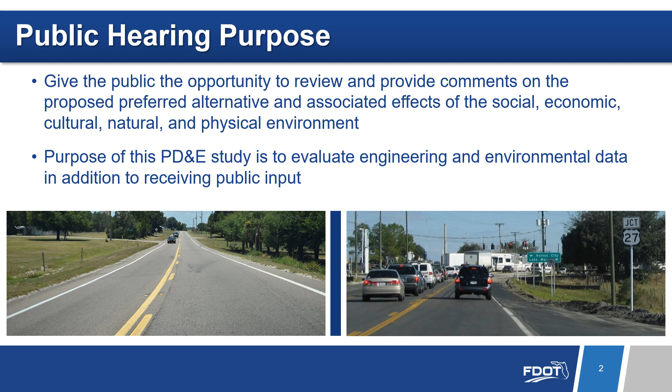The purpose of this PD&E study is to evaluate engineering and environmental data and document information that will aid FDOT District 1 and the FDOT Office of Environmental Management, or OEM, in determining the type, preliminary design, and location of the proposed improvements. The study begins at Martin Luther King Boulevard and extends approximately 8 miles in Polk County to State Road 17. State Road 544 traverses 3 jurisdictions: the City of Winter Haven, Polk County, and Haines City.

State Road 544 plays an important role in the regional network by providing east-west access for a growing area of east-central Polk County. The department proposes to widen this segment of State Road 544. The need for the proposed improvements is to improve operational conditions and accommodate projected travel demand, enhance mobility options and multimodal access, and support economic development.

The proposed widening of State Road 544 meets the objectives of the Polk Transportation Planning Organization, TPO, Long Range Transportation Plan, or LRTP, in transforming this corridor into a complete street.

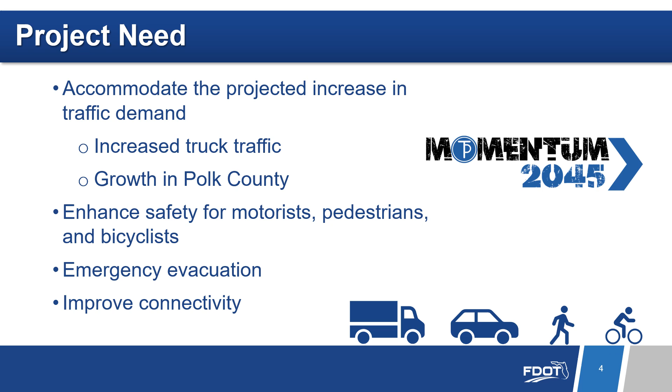At this time, the proposed State Road 544 widening project is identified in the Polk TPO 2045 LRTP Cost Feasible Plan through construction. Segment 1 from Martin Luther King Boulevard to Avenue Y is identified in the Transportation Improvement Plan, TIP, and the State Transportation Improvement Plan, STIP, with funding in fiscal year 2025 for design and 2027 for right-of-way and construction. Within the project limits, State Road 544 is classified as a 2-lane urban minor arterial from Martin Luther King Boulevard to US 27 and is a 4-lane undivided urban collector from US 27 to State Road 17.

The roadway features 2 12-foot travel lanes with turn lanes at intersections along the corridor. Approaching State Road 17, the roadway features 4 travel lanes, 2 in each direction. Paved shoulders are present on the majority of the corridor. The roadway also features an open drainage system.

However, curbs and gutters exist from Martin Luther King Boulevard to Avenue Y, from La Vista Drive to State Road 17, and in other areas where sidewalks are present. Marked bicycle lanes exist on both sides of the roadway from just west of Brenton Manor Avenue to just east of US 27. The posted speed limit ranges from 35 miles per hour to 55 miles per hour. Existing right-of-way widths vary from as little as 50 feet up to 170 feet wide.

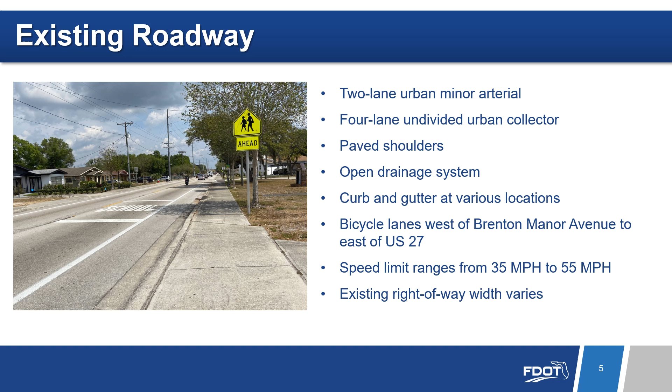Throughout this PD&E study process, FDOT has looked at many different concepts to widen the existing 2 lanes of State Road 544 to 4 lanes, and for opportunities to include multimodal improvements. After environmental and engineering analysis and public and agency comments, many of these alternatives were eliminated.

The last public meeting was an Alternatives Public Information meeting held on February 8, 2022. At that meeting, we asked for your input on proposed improvements. Some of the feedback received included a preference for a 4-lane roadway, attention to traffic volumes at the east end of the project area, concerns regarding future traffic volumes and potential noise, and community access and signal placement.

Based on your comments and additional environmental and engineering analysis, a preferred alternative was selected for State Road 544. Due to the length and diversity of the roadway along this corridor, State Road 544 was divided into 8 evaluation segments. Segment 1 is from Martin Luther King Boulevard to Avenue Y, through the Florence Villa neighborhood.

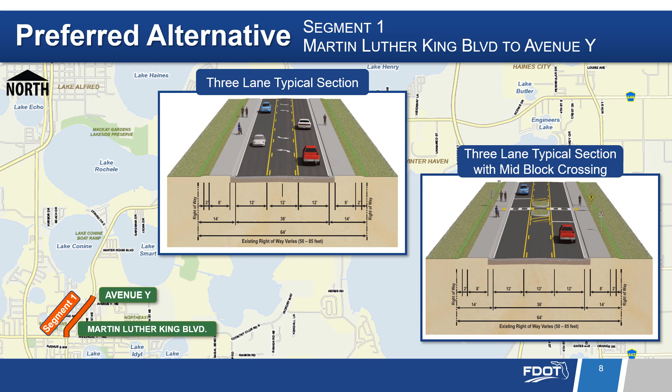The preferred typical section in Segment 1 is the 3-lane typical section with the best fit alignment. It is slightly wider than the 2-lane alternative and will have minor right-of-way impacts with no residential relocations. The 3-lane typical section will provide additional safety and capacity for turning vehicles with the center turn lane. The graphics here illustrate the typical section with and without mid-block pedestrian crossings.

The preferred improvement at the Martin Luther King Boulevard intersection is to maintain the existing traffic signal but add a new southbound right turn lane at the intersection. Improvements also include realigning the 1st Street Northwest intersection with State Road 544 farther away from the Martin Luther King Boulevard intersection. At Avenue Y, the mini roundabout with a 90-foot inscribed diameter is recommended.

Unlike traffic signals, roundabouts ensure continuous traffic flow during power outages, reducing disruptions during events such as hurricanes. This concept will minimize impacts to the residences, businesses, and the church located at this intersection, while providing an opportunity for an entrance feature to the historic Florence Villa neighborhood, and a speed control for vehicles entering the neighborhood.

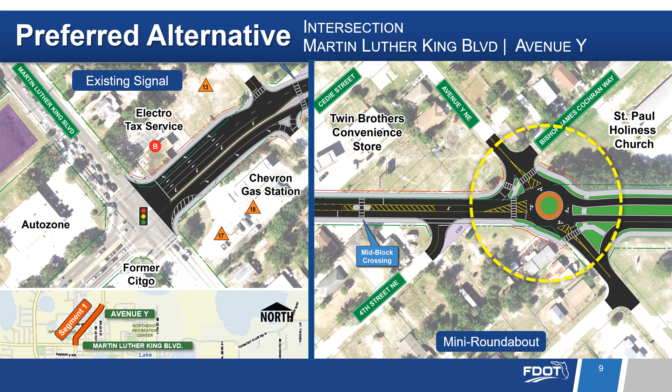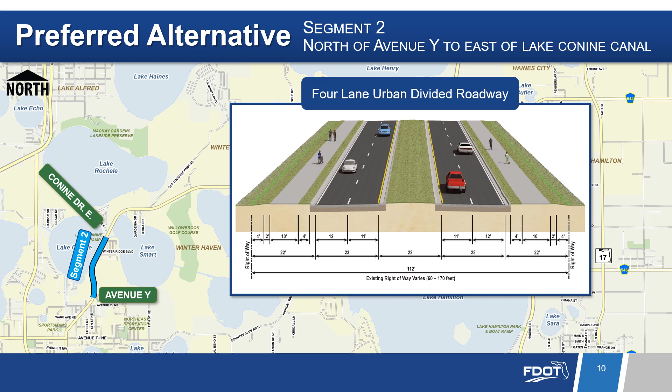Segment 3 is east of the Lake Conine Canal to east of the west end of Old Lucerne Park Road. A 4-lane divided roadway is proposed with widening to the north side of the road. This alignment is recommended to avoid impacts to existing residential developments on the south side of State Road 544 and due to the proximity of the road to Lake Smart and wetlands along the lake.

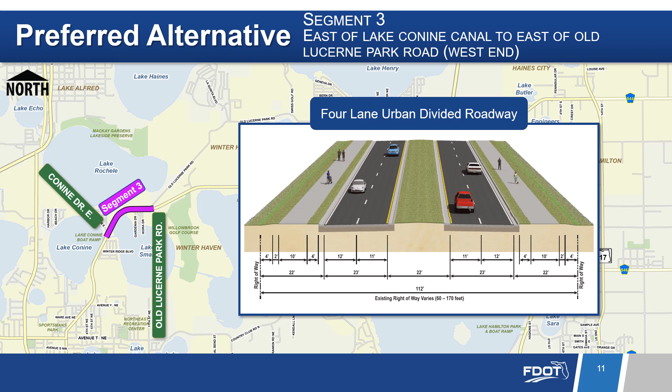The preferred alternative at the west end of the Old Lucerne Park Road intersection is to realign Old Lucerne Park Road to align with Vista del Lago Drive and to provide a roundabout at the intersection.

Unlike traffic signals, roundabouts ensure continuous traffic flow, even during power outages, reducing disruptions due to events such as hurricanes. The roundabout will help with speed control along State Road 544 and improve safety by reducing crash severity when compared to the traffic signal option.

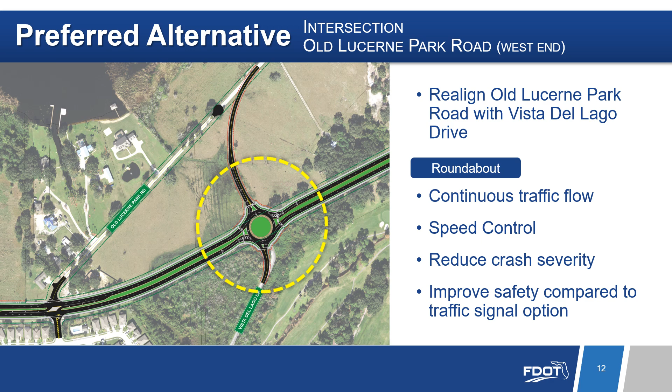Segment 4 is from east of the west end of Old Lucerne Park Road to east of Lucerne Loop Road. A 4-lane divided roadway is proposed with center widening.

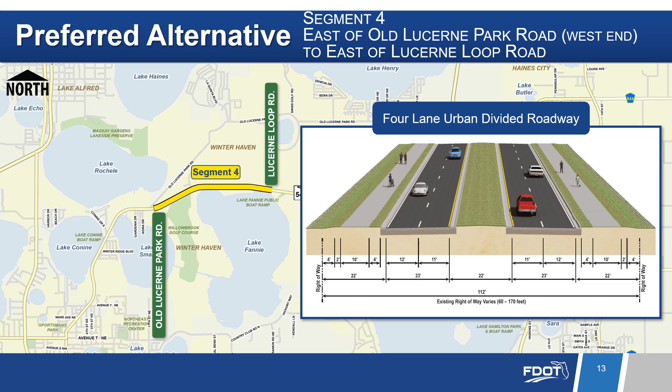The preferred improvement at the Lucerne Loop Road intersection is a roundabout. Unlike traffic signals, roundabouts ensure continuous traffic flow even during power outages, reducing disruptions during events such as hurricanes. The roundabout will help with speed control along State Road 544 and improve safety by reducing crash severity when compared to the traffic signal option.

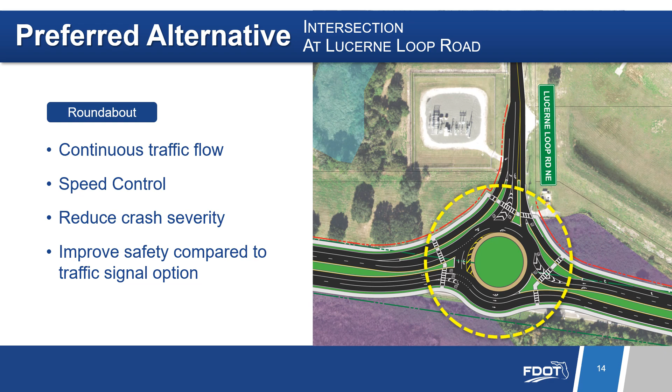Segment 5 is from east of Lucerne Loop Road to east of the Lake Hamilton Canal. A 4-lane divided roadway is proposed with widening to the north side of the road. This alignment is recommended to avoid impacts to the Lake Region Lakes Management District boat ramp and to the proposed Duke Energy transmission easement poles on the south side of the road.

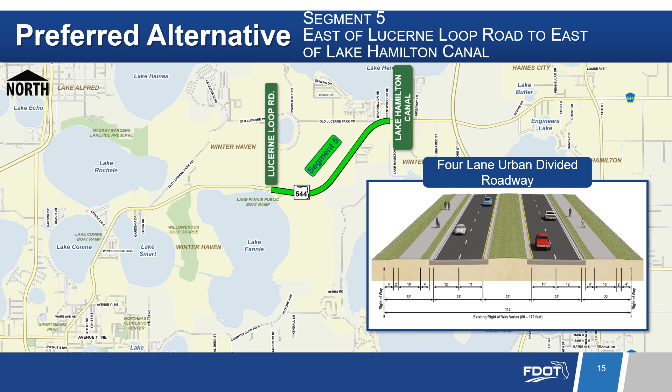The preferred improvement at the east end of the Old Lucerne Park Road intersection is a roundabout. Unlike traffic signals, roundabouts ensure continuous traffic flow even during power outages, reducing disruptions during events such as hurricanes. The roundabout will also help with speed control on State Road 544 and increase safety by reducing severe crashes when compared to the traffic signal option at this skewed intersection.

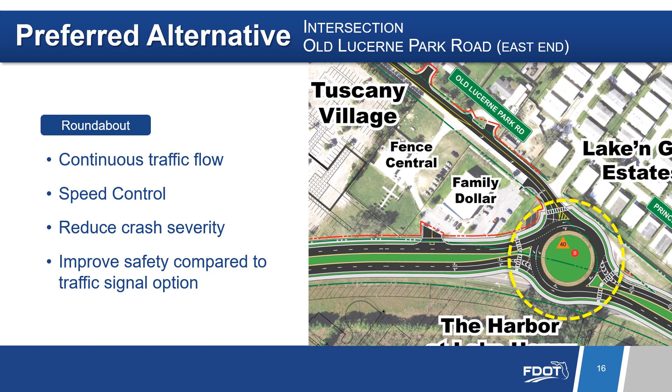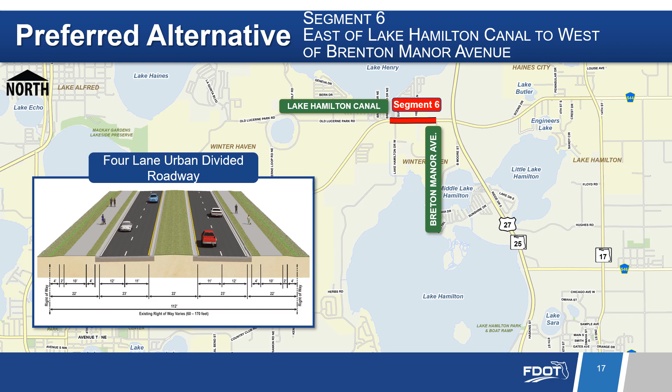Segment 6 is from east of the Lake Hamilton Canal to west of Brenton Manor Avenue. A 4-lane divided roadway is proposed with widening to the north side of the road. This alignment is recommended to avoid impacts to the Duke Energy transmission easement poles and existing commercial development on the south side of the road.

The signalized through-cut alternative is recommended at the Lake Hamilton Drive intersection. This option includes realigning the two internal roads for the developments on the north side of State Road 544 so that they intersect State Road 544 in a single location at the north leg of the intersection.

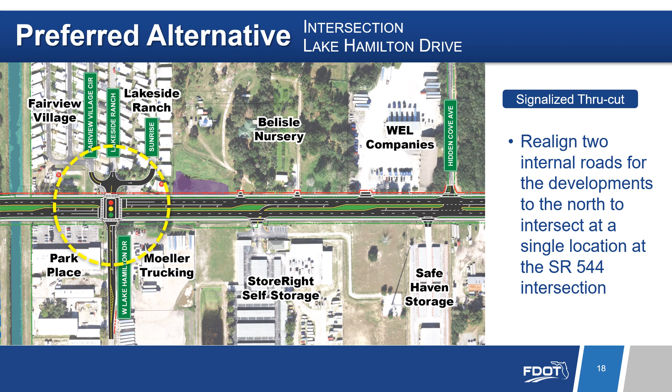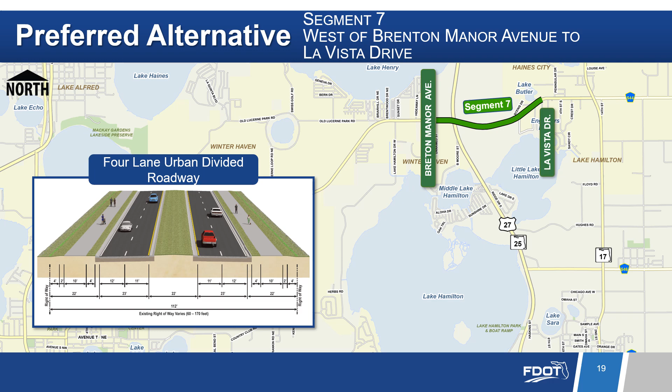This alignment is recommended to avoid impacts to Duke Energy transmission easement poles that switch from the south side of the road to the north side of the road through the US 27 intersection.

The preferred intersection improvement at Brenton Manor Avenue is a roundabout. Unlike traffic signals, roundabouts ensure continuous traffic flow even during power outages, reducing disruptions due to events such as hurricanes. The roundabout will help with speed control along State Road 544 and improve safety by reducing crash severity when compared to the traffic signal option.

This intersection concept is paired with the recommended single-point urban interchange at US 27. The single-point urban interchange is a recommended improvement at the US 27 intersection due to the lower predicted life cycle crash cost with this concept compared to the Northwest Quadrant roadway with 3 signalized intersections.

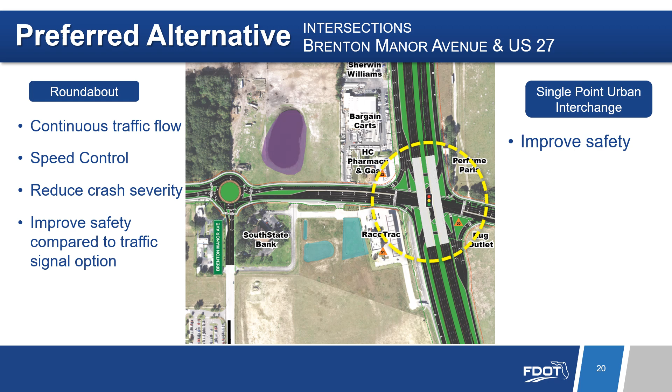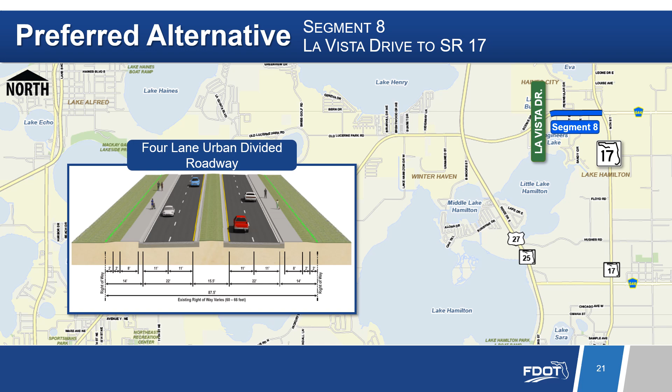The preferred concept for the State Road 17 intersection is a traffic signal with only improvements to the west leg of the intersection.

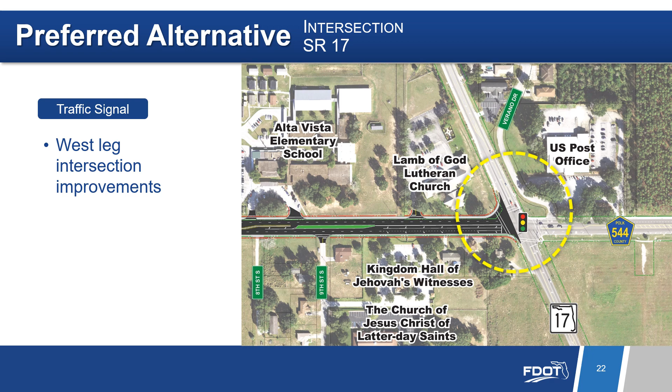Throughout this study, a no-build alternative is also considered. The no-build alternative assumes that no improvements are made to State Road 544 through the year 2045, except for routine maintenance. There are advantages and disadvantages to the no-build alternative.

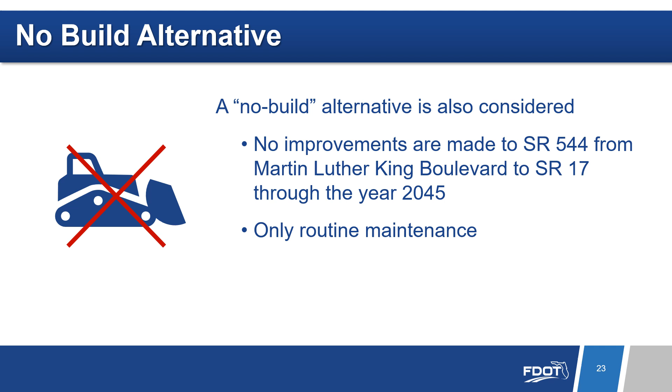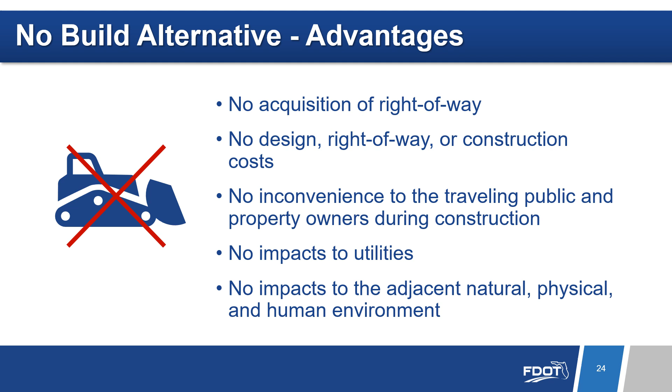Advantages of the no-build alternative include no acquisition of right-of-way, no design, right-of-way, or construction cost, no inconvenience to the traveling public and property owners during construction, no impacts to utilities, and no impacts to the adjacent natural, physical, and human environment.

Disadvantages include it is not consistent with the Polk County Polk TPO LRTP, where the widening of State Road 544 from Martin Luther King Boulevard to State Road 17 is identified in the cost-feasible plan. The no-build alternative does not improve multimodal mobility.

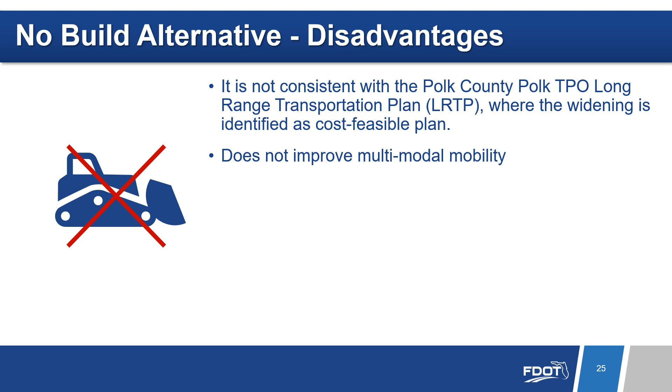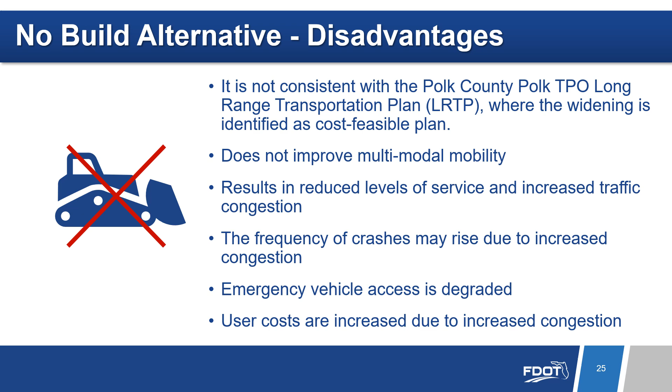It results in reduced levels of service and increased traffic congestion. The frequency of crashes may rise due to increased congestion. Emergency vehicle access is degraded, and user costs are increased due to increased congestion. The no-build alternative remains a valid option and will continue to be evaluated until the completion of this study.

FDOT evaluated environmental and socioeconomic factors relating to proposed widening improvements in accordance with the National Environmental Policy Act of 1969, as amended, and other federal requirements.

The evaluation considered the effects of widening State Road 544 on protected species and habitat, wetlands and floodplains, water quality,

stormwater management and permitting, air quality, right-of-way requirements and relocations, contamination, archaeological and historical resources, recreational sites, noise, land use, construction effects, and farmland.

Protected species and habitats are afforded special protection under the Endangered Species Act of 1973, as amended, and Florida statutes. FDOT assessed species within the project limits, and through ongoing coordination with U.S. Fish and Wildlife Service,

has determined that the proposed project may affect, but is not likely to adversely affect, the existence of certain federally listed threatened or endangered species.

The animal species include the eastern black rail, wood stork, Audubon's crested caracara, Everglades snail kite, and the eastern indigo snake.

Additionally, the proposed project may affect, likely to adversely affect, the existence of certain federally listed threatened or endangered species. The animal species include the blue-tailed mole skink and the sand skink.

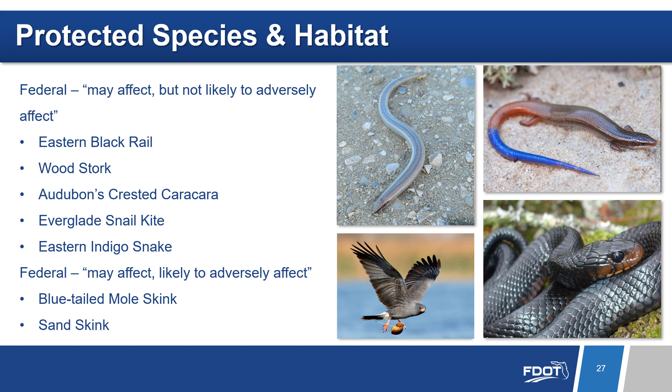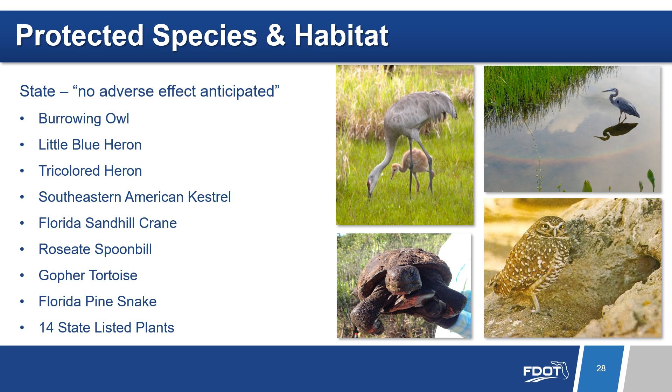Coordination with U.S. Fish and Wildlife Service regarding the final status of these species is ongoing. A sand skink survey will be conducted during the design phase. If the preferred alternative is approved and is located within a tricolored bat consultation area, a bat survey will be conducted during the design phase.

If the preferred alternative is approved by the Office of Environmental Management, FDOT District 1 will continue to work closely with environmental agencies in future phases, such as design and construction, to meet all environmental permitting requirements.

FDOT evaluated wetlands within the project limits in accordance with Executive Order 11990, Protection of Wetlands. The proposed improvements will affect approximately 14.11 acres of wetlands and 2.66 acres of other surface waters.

The department will take all practical measures to minimize harm to this area. The department will mitigate wetland impacts resulting from this project's construction to meet requirements of Florida statutes and the United States Code.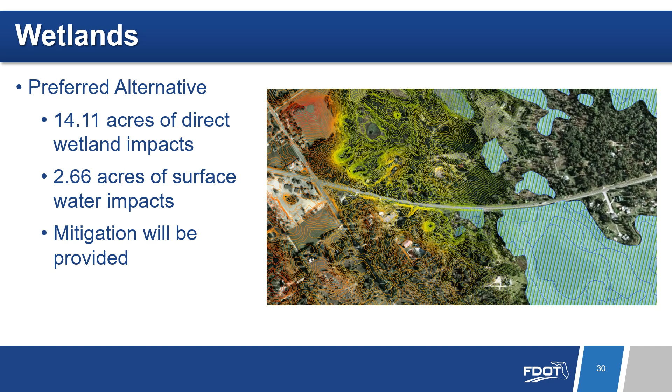The project has been evaluated for potential floodplain involvement in accordance with Executive Order 11988, Floodplain Management. There is no significant change in flood risk as a result of the proposed widening, and minimal impacts are expected to the 100-year floodplain,

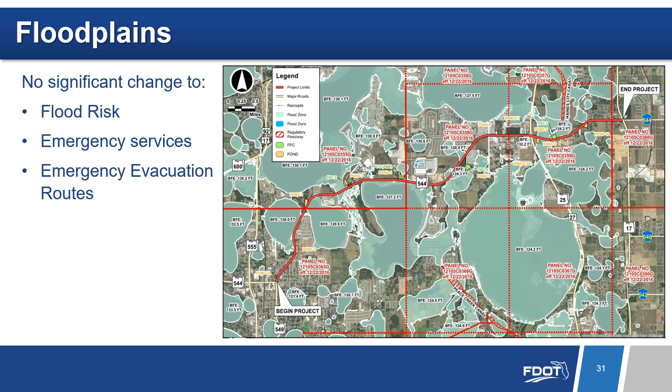nor is there significant change in potential for interruption or termination of emergency services or emergency evacuation routes due to flooding.

Results of the environmental contamination screening showed 3 sites were ranked high for potential contamination, 6 sites were ranked medium for potential contamination, and 30 sites were ranked low or no for potential contamination.

For the sites that are ranked low for contamination, no further action is required at this time.

For the sites with a risk ranking of high or medium, the FDOT project manager and the District Contamination Impact Coordinator will coordinate on further actions during the design phase that must be taken to address contamination issues.

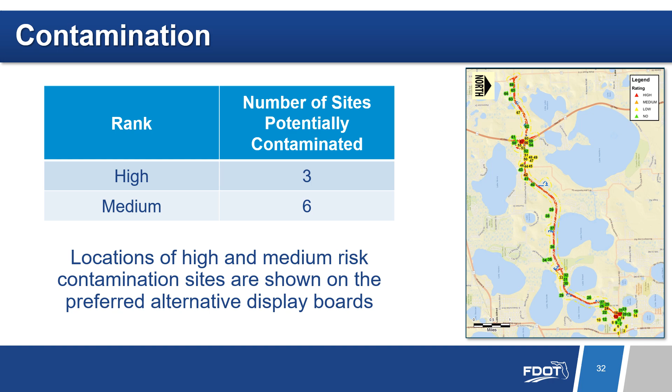Before construction, specially trained crews will address contamination in these areas as required. Locations of these sites are shown on the concept plans on display tonight.

The effects of traffic noise associated with the preferred build alternative have been evaluated in accordance with Title 23, Code of Federal Regulations, Part 772, and with the FDOT PD&E Manual, Part 2, Chapter 18.

It was determined that construction of noise barriers at Winter Ridge Condominiums, Lake Point Landing, Lake Smart Estates, Brookhaven Village, Lake Rochelle Estates, Lake and Golf Estates, and near residences from Pomona Street to 5th Street South

are a potentially feasible and cost-reasonable measure to reduce noise impacts to 62 impacted noise receptors.

A commitment will be made to study this area further in the design phase. If you would like more information regarding traffic noise, please speak with our noise specialist at the Noise Information Table.

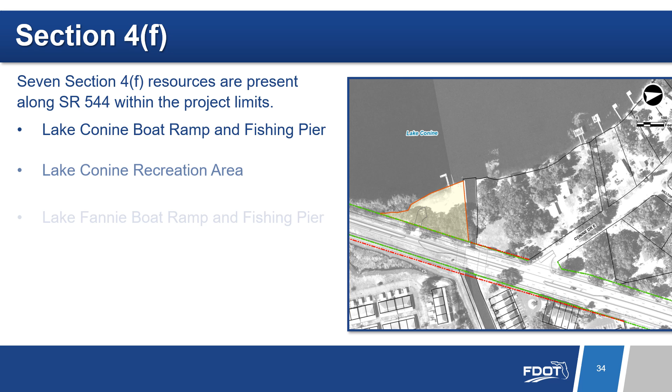The project team examined the project area for publicly owned properties that may be affected under Section 4(f) of the U.S. Department of Transportation Act of 1966.

7 Section 4(f) resources are present along State Road 544 within the project limits: the Lake Conine Boat Ramp and Fishing Pier, Lake Conine Recreation Area, Lake Fannie Boat Ramp and Fishing Pier, Florence Citrus Growers Association Historic District, 2208

Peninsular Drive, 128 Scenic Highway, and Alta Vista Elementary School.

The recommended alternative will not require acquisition of land from the Lake Fannie Boat Ramp and Pier or the Lake Conine Recreation Area.

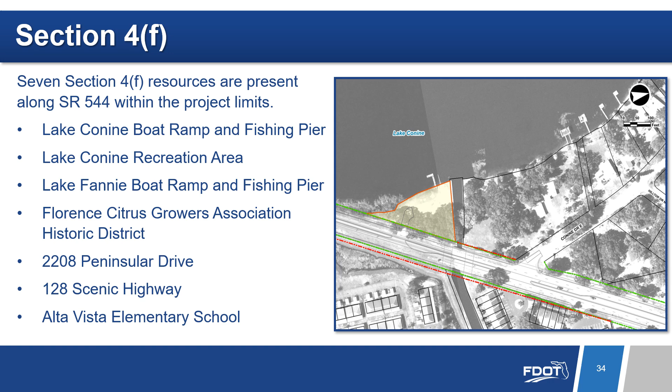One of the unavoidable consequences on a project such as this is the necessary relocation of families or businesses. On this project, we anticipate the relocation of 1 family, 5 businesses, and a storage structure related to 1 business.

All right-of-way acquisition will be conducted in accordance with Florida Statute Section 339.09, and the Uniform Relocation Assistance and Real Property Acquisition Policies Act of 1970, commonly known as the Uniform Act. If you are required to make any type of move as a result of a Department of Transportation project, you can expect to be treated in a fair and helpful manner and in compliance with the Uniform Relocation Assistance Act.

If a move is required, you will be contacted by an appraiser who will inspect your property. We encourage you to be present during the inspection and provide information about the value of your property. You may also be eligible for relocation advisory services and payment benefits.

If you are being moved and you are unsatisfied with the department's determination of your eligibility for payment or the amount of that payment, you may appeal that determination. You will promptly be furnished necessary forms and notified of the procedures to be followed in making that appeal.

A special word of caution: if you move before you receive notification of the relocation benefits that you might be entitled to, your benefits may be jeopardized. The relocation specialists who are supervising this program are here tonight. They will be happy to answer your questions and will also furnish you with copies of relocation assistance brochures.

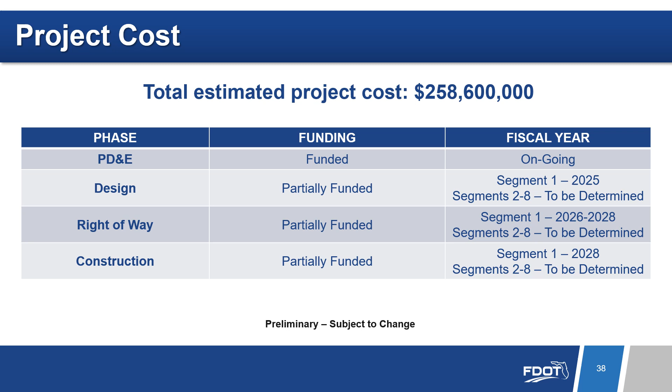At this time, FDOT's adopted 5-year work program includes funding for Segment 1, from Martin Luther King Boulevard to Avenue Y, for design in fiscal year 2025, right-of-way in fiscal year 2026 through 2028, and construction in fiscal year 2028. Funding for segments 2 through 8 have not been identified at this time.

The department anticipates completion of this PD&E study by summer 2025. The study schedule is on display this evening.

All hearing materials presented tonight are available to the public on the project webpage and will remain posted for your review. The technical documents are also available for review in person at the Winter Haven Public Library, 325 Avenue A Northwest, Winter Haven, Florida, 33881, Monday through Thursday from 9 a.m. to 6 p.m., Friday and Saturday from 9 a.m. to 5 p.m., closed Sunday.

And at FDOT's District 1 office, 801 North Broadway Avenue, Bartow, Florida, 33830, Monday through Thursday, 9 a.m. to 5 p.m., until February 10th, 2025, 10 days after the hearing. If you would like to review these materials at the District 1 office, please make an appointment by contacting FDOT's project manager, David Turley, using the contact information included in your handout. You may also visit the project website at www.swflroads.com/project/440-273-1 for the latest study information, schedule, and upcoming events.